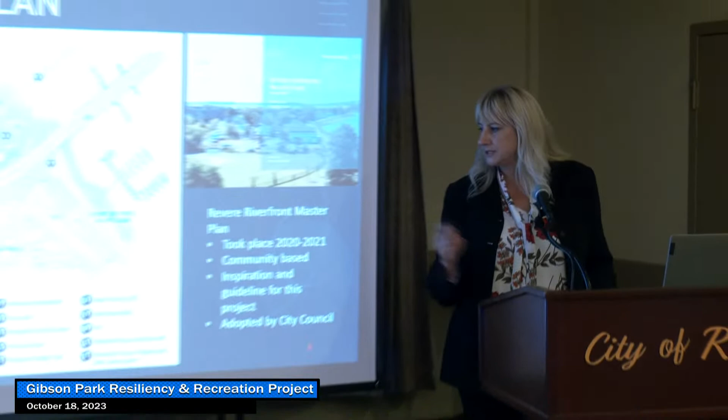So we are going to talk about everything that's included in Gibson Park. We started with the master plan, and that took place in 2020. It was adopted by the City Council in 2020. And we have used this as our guiding light, if you will, in order to develop elements of the park.

And then when we started to dig into the park, we started to realize, well, there's a lot more to it. We were able to acquire the boatyard back in 2020 at the tail end of the year. And with that, we're able to expand recreational opportunity to extend Gibson Park a little bit further.

When we started to look at what the flooding situation was there, we realized we can't really do any flood mitigation or flood risk reduction on that particular parcel or in Gibson Park without considering Mills Avenue. So that's how one project wrapped in three different parcels, if you will, but they are all called the Gibson Park Project, and they all fit under one umbrella.

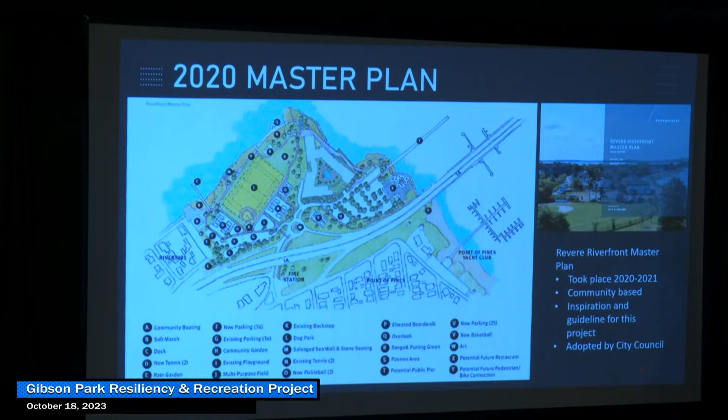So that's why maybe you haven't heard from us in a while, because we've been working through a number of elements having to do with permitting, which is very complicated. John will touch on it. We won't go too much into the weeds. If anybody wants to read the MEPA, the initial filing with MEPA, that is available on revere.org under projects and initiatives.

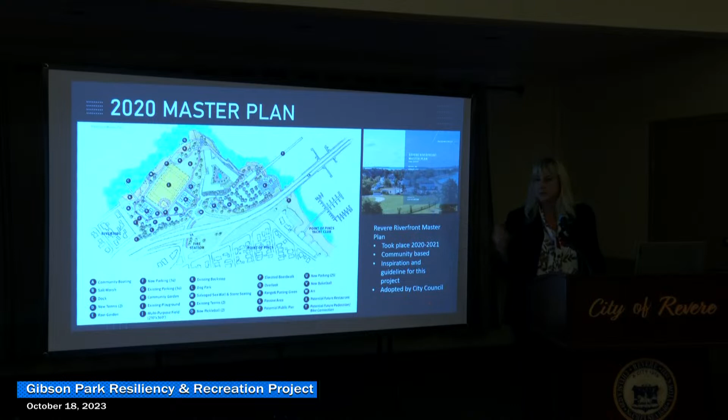So we've taken all of those comments and gone back into redesign an uncountable amount of times because there are many resource areas that overlap. So we're trying to work through all those challenges and still deliver the product that we spoke about at this initial meeting. So without further ado, I'm going to hand it over to John, and he's going to get to share the good stuff.

Thank you very much, Elle. Good evening, everyone. Pleasure to see you all again, be back talking. So Elle had touched on, we call it the Gibson Park Resiliency Project because that's kind of the anchor parcel, but it does pretty much take up this entire area.

So you can see it's the two separate parcels and the western edge of Mills Ave along the Pines River. A lot of resources in the area, a lot of different activities, but we are doing our best to provide both public amenities through the park and through the facility, as well as provide stormwater management and flood protection to the neighborhood, which is badly needed.

So just to show everyone a couple of drone photos of the area we're looking at. On the bottom you can see Gibson Park, looking from the top of Gibson Park, looking south at the existing conditions. On top it shows the former boatworks site, as well as the section down on Mills Ave, where we'll be working along the western edge to provide some shoreline protection.

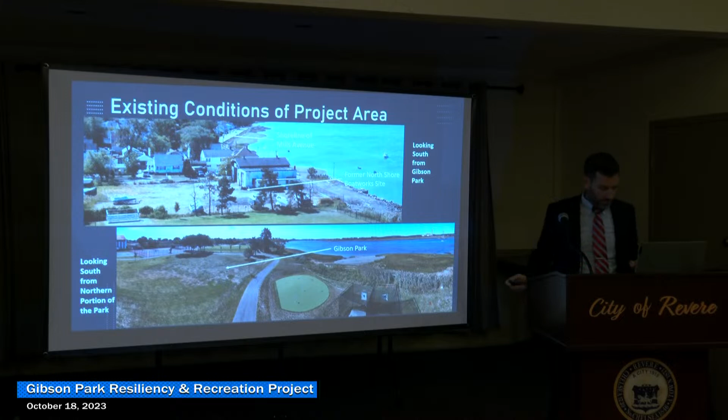The project history got birthed from the master plan. We got a lot of input from the public during that process, when we were first working our way through Zoom and figuring out what the priorities were and what people wanted to see happen. We tried to take those elements and develop a more holistic, fleshed out design than what was just done conceptually.

As you can see from some of the photos, and those of you who live it know very well, flooding from the river, even sunny day flooding, is a more persistent issue and more of a risk. So we need to learn how to address that.

The major concerns were persistent flooding and lack of formal access to the water. We don't want to provide a boat launch or anything like that, but people should still be able to get out to the Pines River—it's great for rowing and kayaking. We want to provide that public access and make sure Gibson Park, as it's redeveloped, has more amenities to serve people of all ages in the city. That's how we've gotten to this place.

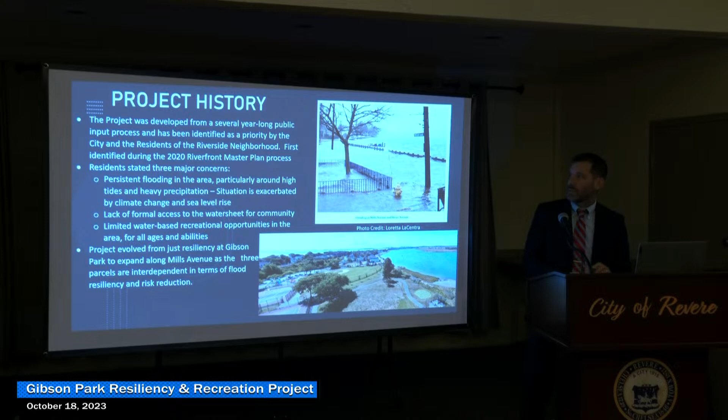There's a delay every time I click. I apologize.

A couple slides ago, Elle showed the plan from the 2020 master plan. This is the more updated version—we've gone through a lot of iterations, working with the city rec department and Michael Hinojosa on some of the priorities, plus additional input. This is the updated layout for the two northern parcels, 29 Thayer and Gibson Park.

One of the big aspects that remains is the multi-purpose field, which will be able to be used for soccer, different sports, baseball, softball, as well as lacrosse practices.

If I have a question, should I wait till the end, or should I ask now? You might get answered throughout, so go ahead.

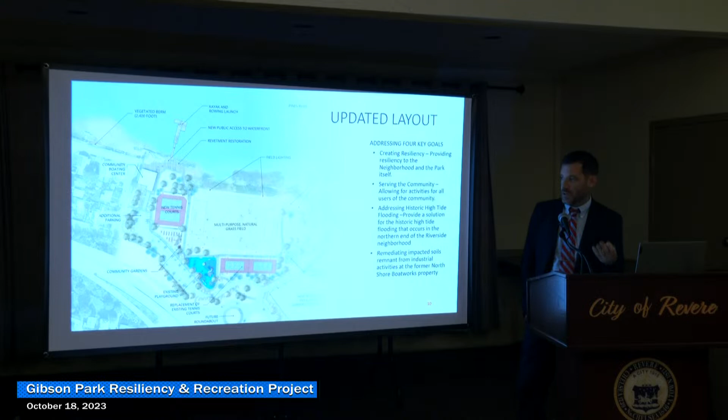A gentleman noted that the multi-purpose field area is a swamp and asked if something will be done to alleviate that. Yes, we're going to address that further on in the presentation—I actually have a couple slides that show how we will do that. It's a great question, because that is a good consideration.

Someone asked if we have this overlaid on an actual map of the area. We don't have that in the presentation, but I do have that and we can perhaps show it to you later.

We're going to keep four tennis courts, but relocate two of them south—partly on the 29 Thayer boatworks site and partly on the southern part of Gibson Park. We're stacking the other two courts to make room for access once the roundabout gets built. The building will be rebuilt totally redone and look great, with a nice waterfront deck, community space, and access to the water sheet through a gangway and some dock floats.

So we think we're hitting all of the big concerns that came out of it, and one that came up during our subsequent activities, which Elle alluded to, is there is some historic contamination remnant from the boatworks property that needs to be addressed. So we will be addressing that.

You can see that down here, but those soils will be remediated as part of the redevelopment process. We're also going to be providing protection from high tide flooding. We're going to have a redeveloped park, and we're going to create resiliency to protect the entire Riverside neighborhood.

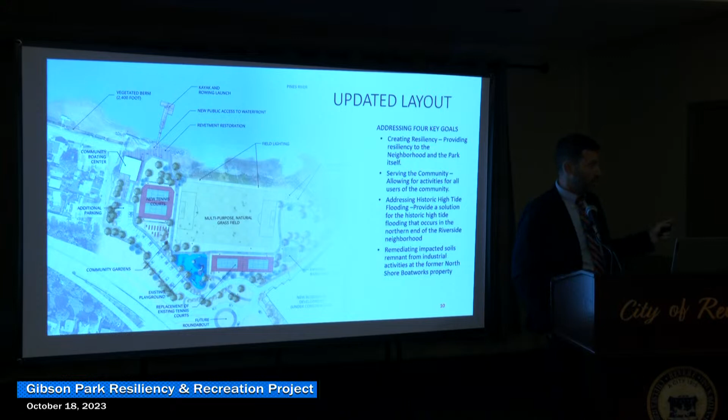Thank you, John. I'm sure I've met a few of you, but it was in little teeny boxes doing Zoom calls two years ago, so they were really little. But we had some really amazing public meetings that were awesome, that really pulled that master plan together.

The good news is we've really stayed true to that master plan. Most, if not all, of those elements have been incorporated into the plan. So we're really excited now to be able to take this next step to make the plan and that master planning process become real.

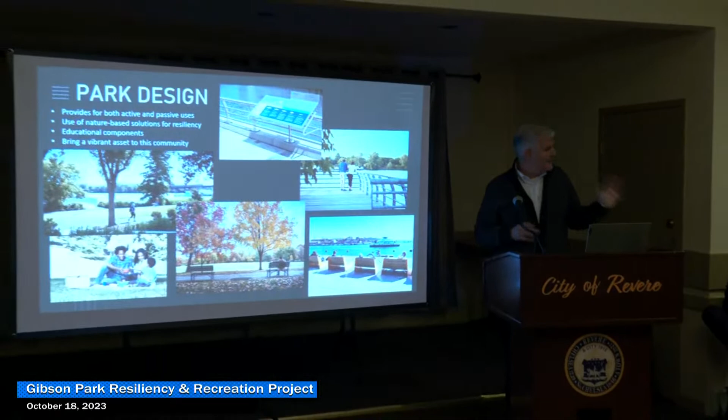As landscape architects, our focus, in addition to the stormwater elements John mentioned, is making sure we've got a really enjoyable public open space that you guys can use more often than you do now, given some of the drainage issues and whatnot. So for the park design, a lot of this has stayed true.

We'll be adding a lot of new trees. We'll be keeping the meandering asphalt pathways so that you will have the ability to use the fields, but you will also be able to use the park itself. So when those fields are in use, there will be other spaces open to the public, really trying to make this a very community-focused, neighborhood-focused open space.

Just some of the images we've got here obviously are keeping this fairly passive. Here we go, this character will continue on.

Likewise, we'll be introducing more seating, more trees. We're doing everything we can to keep the trees that are out there. Most of those will most likely be at the northern end of the site.

As you can imagine, as we start to do grading and put the new multi-purpose field in, we will lose some of those trees as it relates to the field. But that field is sized to be a full-size soccer field, and we've also got the ability to rotate those fields, so you could have smaller kid fields running perpendicular to that, trying to keep it as flexible as possible.

John did mention we are looking at areas particularly closer to the boathouse, where we will have overlooks and opportunities for people to get much closer to the water on raised platforms.

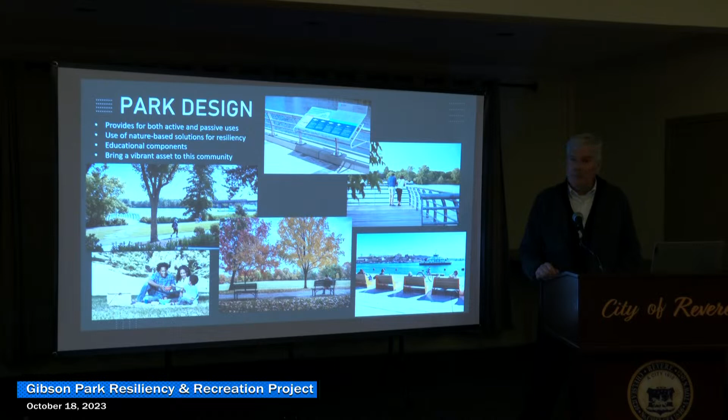For park design, I'm going to work this with John, but the focus is on getting a really good soil profile and turf surface on what most people would see on a regular day-to-day basis, getting that set up for a variety of youth activities. But there's a lot more to that field with what we're doing with the resiliency components of the project.

John will talk about this, but this is all the hidden stuff that's going to be underneath that turf that will do all the drainage work we're looking for. We're working with them to get that profile done correctly, so at the end of the day we've got this amazing turf surface, and it is real turf. We went through numerous conversations with the permitting folks to get turf, and it will be irrigated, so we're trying to get this turf and soil profile to be as rugged and usable as frequently as possible.

The question was, will the soccer field be raised up higher? There is a whole grading exercise. I'm going to let John get into more of the technical information there, so maybe that's a good segue to hand it off.

Thank you, Sean. I know you had some questions about the field. You're right, there is very poor drainage, particularly in the northern part of Gibson Park. We noticed that it retains water there. In order to develop a field, you don't want it to retain water, because every time it gets used it just turns into a mud pit. We don't want to have that.

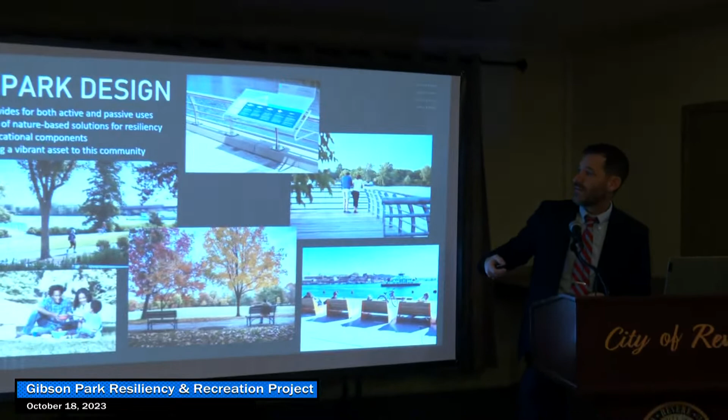So to redevelop this multi-purpose field, the idea is we're going to over-excavate that entire rectangular footprint down several feet. Let me go back two slides so you can see where it is. For reference, the existing baseball softball field is about there, so this extends a lot further north.

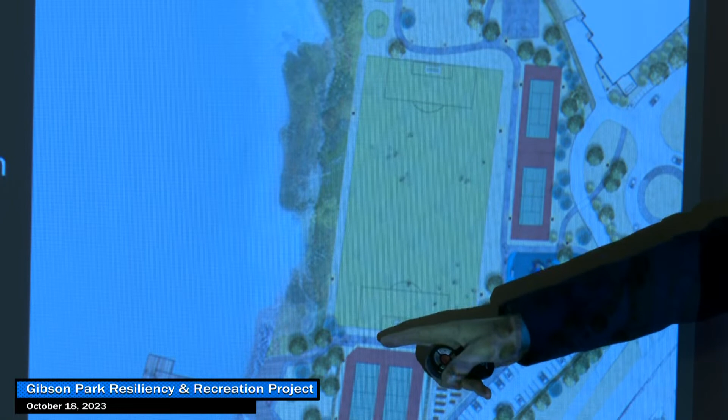That looks like it's in the marsh. It is not - we've overlaid it and laid it out. You're right, for reference the foul pole is about right here. So we will over-excavate that. What does that mean? We're going to dig it up, take all the soil out there down about 4 or 5 feet.

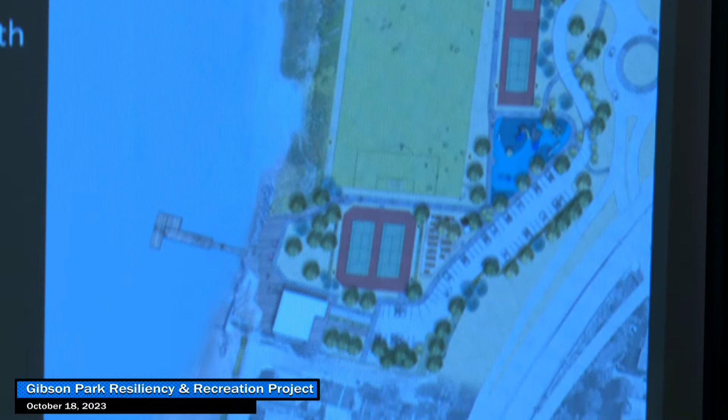Is that going to cause more water to come up? What do you mean by that? The question was, coming off the top of the ground you'd be going closer to the water table, so isn't it time to get a bigger swamp? Let me walk through the exercise.

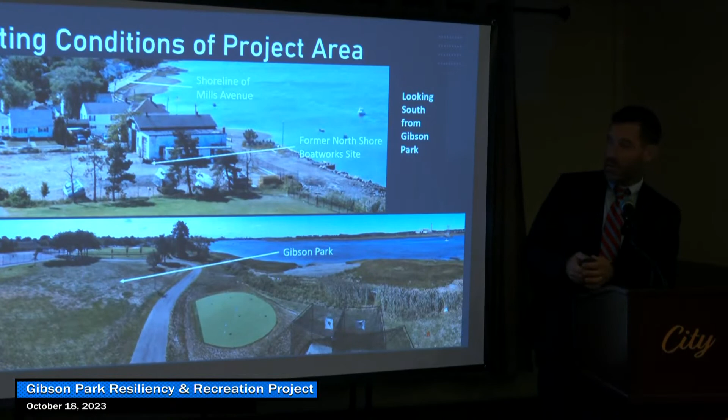We're going to excavate all that soil out, cut it down 4 or 5 feet, and put that soil over on the side layer temporarily. Then what we're going to do is rebuild it up with different material. Am I going the wrong way? Isn't this back? Oh, okay, sorry. We're going to rebuild it up.

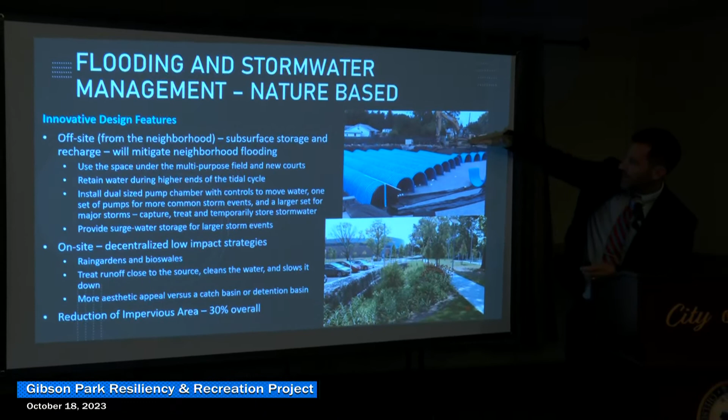First we're going to put in a layer of crushed stone. So you can see the top of our field will be up here, and we're down about 4 feet. We're going to put in 6 to 8 inches of crushed stone as a base.

Then we're going to put in these plastic stormwater chambers right here. They're open bottom, so it allows the water - they can store it as needed when you get surges, and then it allows the water to penetrate back into the subgrade. So it's a more natural way of handling stormwater rather than just sending it out to the river. This is a good way to provide storage, particularly at high tide.

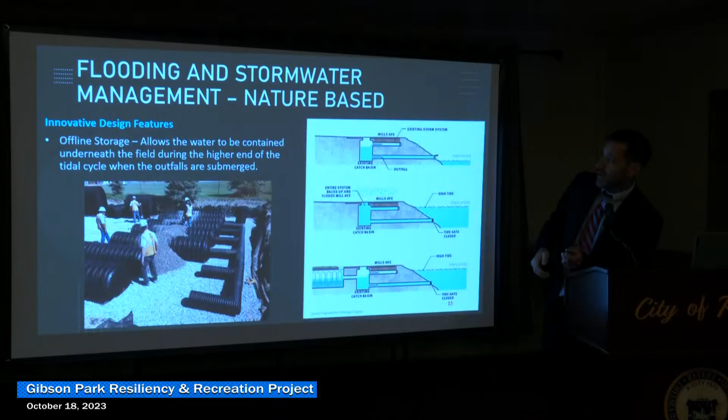So we're going to put in these chambers, cover them with a little bit of stone, and then go back up into it and rebuild - now we're creating the subgrade for the field. We're going to have more chambers along the perimeter, and then put in a sand base, which provides a flat surface as a buffer between the stone and sand so you don't have soil migration or problems going down into the stone. That's going to be your base.

And then you're going to put in a good - Sean had the marker over here, thank you - we'll put in a mix, a special soil design mix that'll have enough organics to allow the field to grow, but enough permeability to allow the water to permeate through it, and it'll be graded so your highest point is in the middle of the field.

So your highest point will be right through there, and then it'll grade off slowly, pitched. It'll be imperceptible to the eye, but enough to get the water off the field so it doesn't stay there. It's within the tolerances of a soccer field and a lacrosse field, though we have to double check that. The idea is it keeps the surface usable, moves the water where we want it to go, and allows us, with that substructure, more offline storage.

Question: wouldn't that direct some of the water towards the tennis courts and the playground? Yes, you're absolutely right, because as I mentioned, it's peaked in the middle. Gibson Park, as you know it now, is going to look very different at the end. We're going to have perimeter drainage.

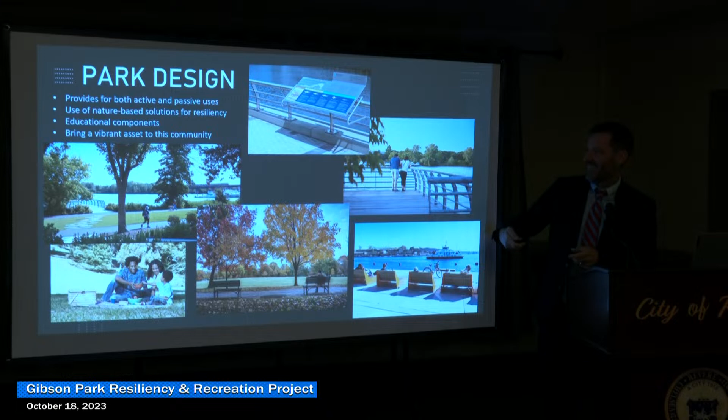Which way am I going? Come on, there we go. I probably clicked too much.

These perimeter drainage lines will be along the edge as a first interceptor trench. We'll have more, or I'll get into it in the next slide, more aesthetically pleasing stormwater controls as well. But yes, as we're rebuilding the field, we're going to make sure that all stormwater is managed and can recharge.

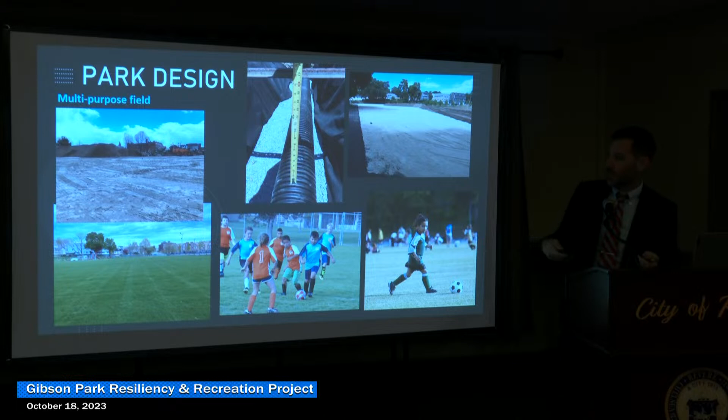This is a very coastal area, very sensitive with natural resources, so we've got to be careful and cognizant of what we're doing with the stormwater, how we manage it, where we treat it. The best thing to do is treat it closest to its source, treating any impervious runoff, any pavement, because that's where you have oils and salts that could impact the river. So near the impervious areas, parking lots and tennis courts, we're going to be putting in rain gardens.

It's the same thing where we dig down, for these ones 2 to 3 feet, depending on the soil table, and put in crushed stone at the bottom with a perforated pipe, and build it up with a planting medium, a soil medium, that supports plants but is also permeable enough to allow the water to infiltrate through. Those will be connected to a traditional catch basin and pipe network, which provides treatment. The plants' roots uptake any bacteria or metals, and they treat the first flush, it's called.

Question: what's the annual cost of maintaining all this additional plant? When we were putting that together, we have to have operation and maintenance plans when we submit the permit packages, and one aspect is to quantify how much it costs annually. I don't have that right now, but we will have it in our submittal coming up.

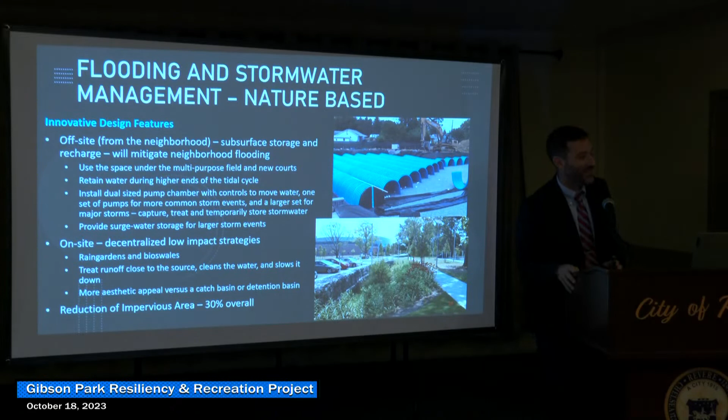Question: with these plants, do we think about things like butterfly gardens? I'll turn to Sean, that's out of my area of expertise. No, absolutely, that's a really good question. The beauty of those, in addition to the ability to take up that water and help purify it and improve water quality, is they create habitat and pollinator gardens. All of those plants are part of that plant palette, so whether it's bees, butterflies, or food sources, all of that would be part of it. It's just one of the bonuses you get as part of that community. Can we target butterflies instead of bees? Oh yeah, absolutely.

Yeah, a lot of those same plants and the flowers and the nectar are going to be really interesting to bees and butterflies alike. But yeah, absolutely, he said yes.

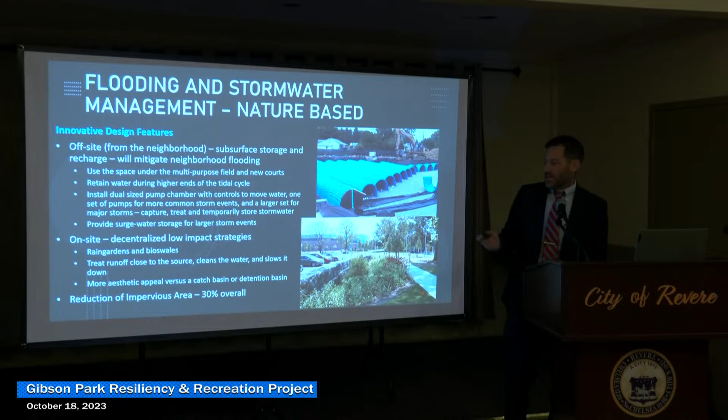Yes sir, I'm reading a little forward. It says installed dual-size pumps. Is there going to be like a pump station down there? Yes, so it's going to take me a minute to get back to the right slide again.

On 29th, so the question was about the pump station. We noted that there's going to be a dual pump system. Over here in the corner on 29th and Thayer, because you can't get there by gravity, and because this is the lowest point of the area, we're going to have to pump up to get to that subgrade.

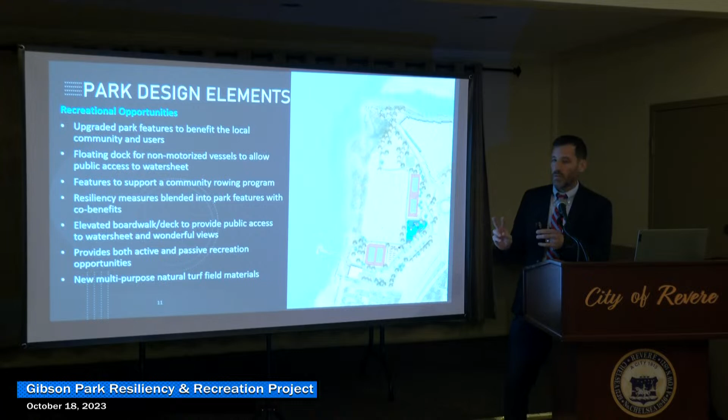How we're going to handle that, because you're going to have your average storms with very low flows, and you're going to have some really big storms that create a lot of runoff. So you want to have two pumps just as a backup, that's good standard practice. We're going to have two low flow pumps and two high flow pumps, so that when the low flow pumps get overwhelmed, the high flow pumps can turn on and discharge. That'll be located right around the corner of Thayer and Hayes, near where the existing access is currently.

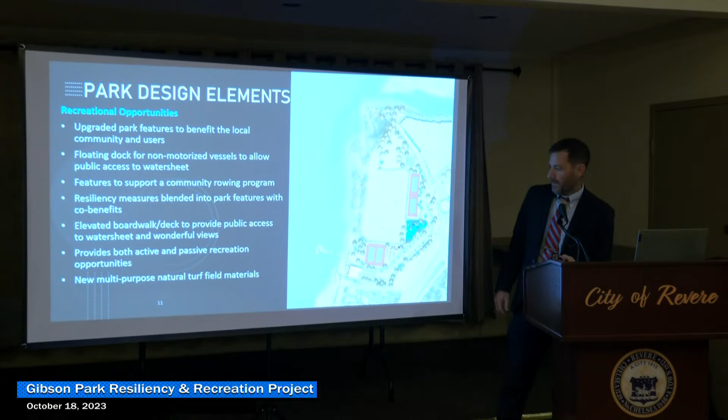Okay, I'm just going to pause for a second. We were initially going to take questions at the end, but we do have some questions from the Zoom line, so we're going to pause for a moment and take some of those. Then we'll pause questions until the end, since some of the things you might ask we'll be addressing as we continue. Daria, would you mind letting us know what you have in the chat?

The first question: the berm they're installing along the shoreline, does it restrict or eliminate our ability to launch our dinghies to our boats on the moorings? Many of us on Mills have access points currently and use dinghies to reach our boats on the Pines River. So the question is, will the berm limit access for the current access points for dinghies and docks for people who launch to get out to their vessels moored in the Pines River?

So yes, we are going to get into that a little bit later, but that is a valid concern. One of the things that's come through the regulatory process is that we need to minimize those access points. I do have a slide later on that shows what the revised access points will be. We'll get into that, but we're getting ahead of ourselves, so I'll jump into that a couple slides down.

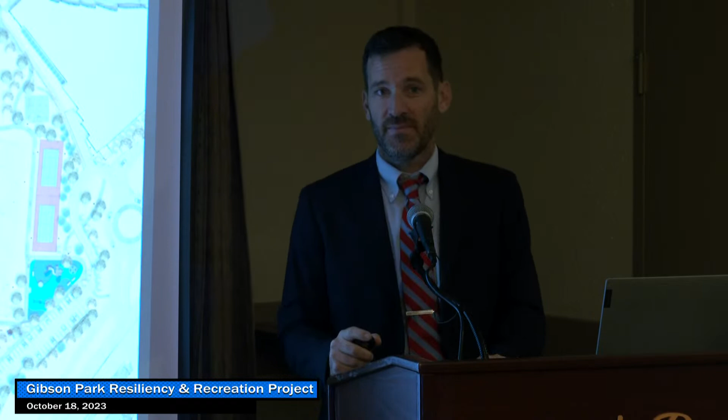So you're going to minimize the access points? The question was, we're going to minimize them, there's only going to be one access point at grade. There will be other access points, but this one will be at grade, so we get to use less of the river.

The next question is, will the field also have baseball? The question was, will the field also have baseball? Yes, that's why it's called a multi-purpose field. We're going to try and maximize sports, and that'll be for the recreation department to decide, but yes, that is intended for that purpose. Okay, it's only those two, actually.

Okay, so I think now we're going to hold questions to the end, because we are going to get into a lot of this stuff further down the line.

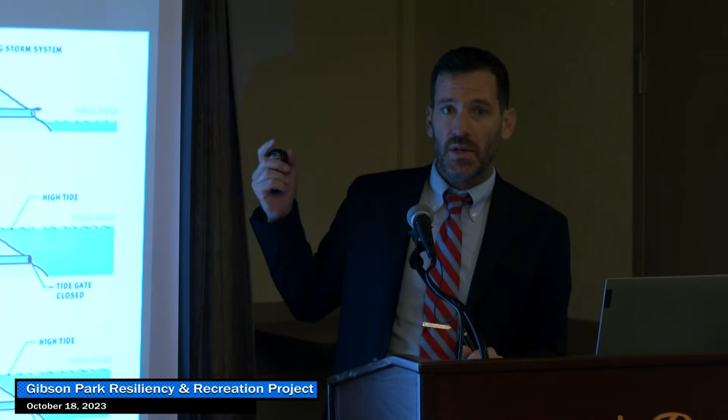I just want to talk about how we're going to be handling the stormwater to provide this offline storage. As you know, right now all the outfalls where the stormwater currently discharges are tidally influenced, meaning that at high tide the water cannot discharge and it backs up into the system, and that's what can exacerbate some of the flooding, particularly along Mills and Thayer Ave.

So how we're going to address that is by having that pump system and having that offline storage through the chambers, so that when the outfall is submerged, at least for the one at Gibson Park, we're going to put a tide gate so the tide can't come back up into the pipe. We're going to pump that water up into those subsurface chambers, and then if it's a really big storm or there's a large volume, they'll be able to redischarge after the tide drops down and the outfall is exposed.

They'll be able to follow its natural course, but this way it prevents the flooding from the neighborhood and captures it underneath the field. So that's one of the key features, so we're not making problems worse for the neighborhood.

So now, working our way south, this is what the boatworks site is going to look like. Gibson Park is up here, and Mills Ave is to the left of the screen. This is an aerial view, so you can see where we've expanded parking down from Gibson Park, and we're going to have it along this side.

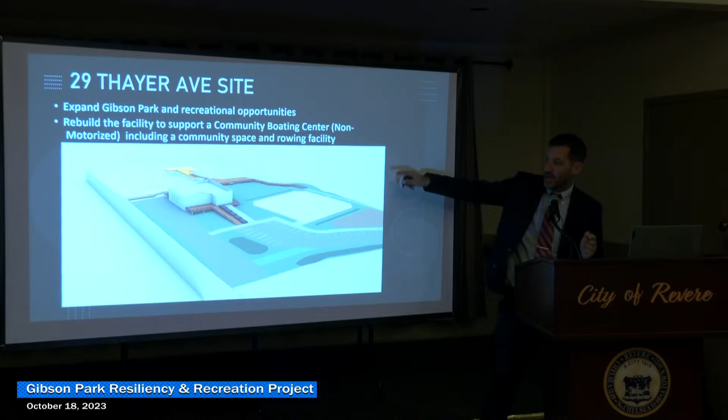We're going to have more of a passive recreational space, along with opportunities for residents to store kayaks and canoes. Because we'll be displacing some of the access points, they can create new access points to use this facility.

This is a perspective from the other way. Now you're looking from the Pines River north, looking north-northwest. Coming out from the redesigned building, you can see we're going to have this great elevated deck with a ramp up that you can walk, accessed from Gibson Park, and also from the parking area.

We'll have a gangway down with low-profile floats that'll allow for public access for launching non-motorized vessels like kayaks, sculls, and canoes. We think it's going to be a great asset, integrated in with that.

We'll have a sheet pile wall that continues our elevation for storm flood surge protection, but you won't even be able to see it because the majority will be underneath the deck, and then it ties in. This is the start of our berm, which actually starts a little bit over here.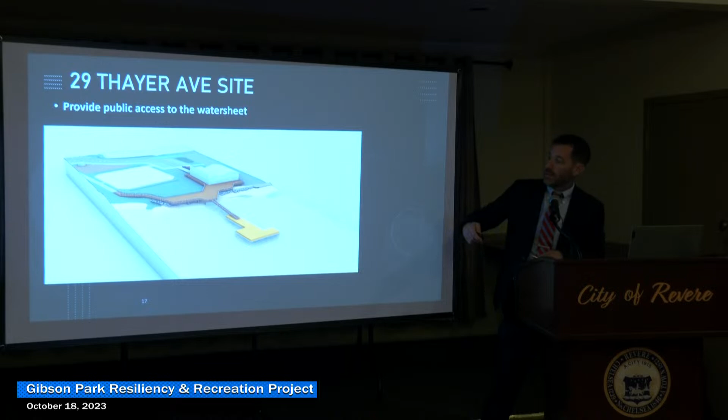So with that, I believe it's time to get into the details of the boathouse facility, and I'll pass it to Andrew.

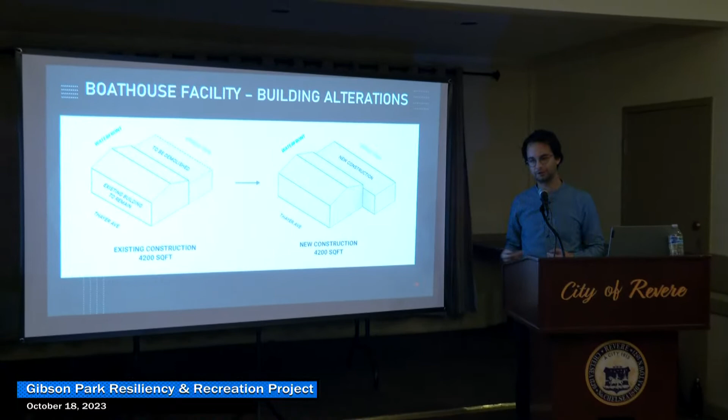Hey everyone, I'm Andrew Brooks, a director at Design Lab Architects. With me today is the rest of the Design Lab team, Rand and Sam. We also have a much more extensive engineering team helping us with the structure, plumbing, electricity, and everything like that. Briefly about Design Lab, we specialize in community buildings and buildings that require resiliency upgrades, so this is a perfect project for us. We're super excited about it, and we also love sailing and rowing, so it couldn't be more perfect for us.

To get into the building, we are proposing to demolish the CMU section of the building, the section that does not have the gabled roof—it has the flat roof. We will be rebuilding that section at the same square footage, but it will be a bit longer.

Right now, you cannot fit an 8-person crew boat in that section—it's not long enough. So we're proposing to build it long enough to fit an 8-person boat, which will allow us to more efficiently store those boats, and that section will be the boat storage section.

After studying the building a lot more, we are proposing some different demolition than what was in the previous master plan. We were looking at the exterior brick facade, and that facade is not structural—it's just holding itself up, and it's severely damaged by flooding, rain, and deferred maintenance. In order to bring those walls back up to a standard that would support this building long-term, it would be significantly more costly to maintain that brick.

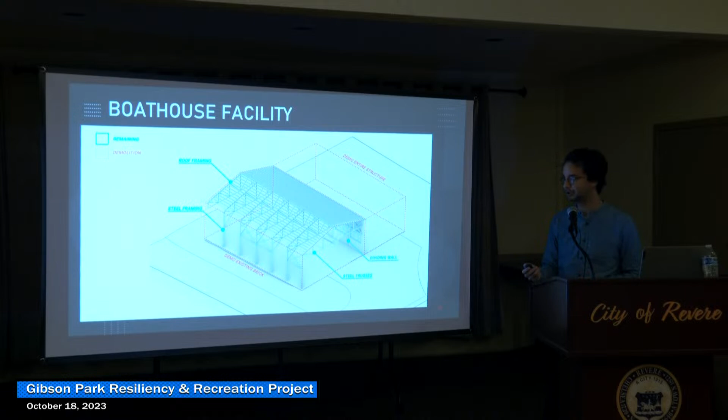I'm not sure how many people have actually been inside, but it's a rather beautiful building with a lot of artifacts within it that we're proposing to maintain.

Some things we're not proposing to maintain, like the existing lighting and the box fans hanging from the ceiling. But in this view you can see the brick wall we're proposing to maintain. There is existing glass that we'll be removing, but we'll be installing new windows—a different material and a bit thicker—while studying and maintaining the rhythm of that leaded glass system that already exists.

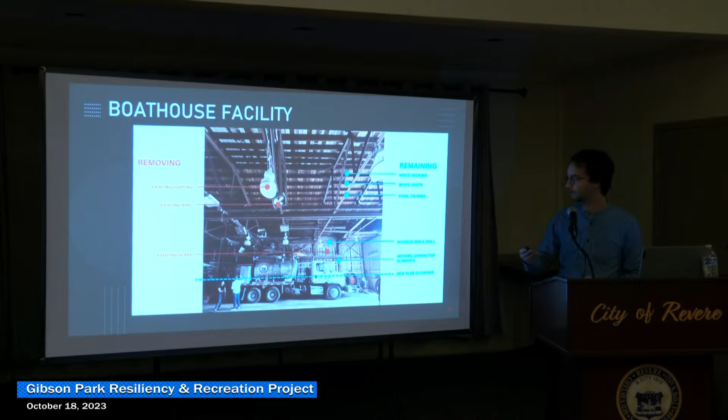We are going to keep the wood decking to the best extent we can, and of course the wood joists and steel trusses will remain. There will be some additional steel within this, but it will be expressed differently and won't be made to look like this existing steel, so you can clearly see the history of this building.

This is another view looking at the exterior wall—looking at Thayer Ave from the inside. That brick wall we're proposing to remove, as well as those windows, the sills, the lighting, and everything considered a room in this building, will be removed, and the new design will be put in place.

But of course we'll still be keeping the wood decking, the wood joists, and the steel trusses. There are a few smaller elements here, like the rails for the huge doors that we'd like to keep—those are hanging off the structure, so they're not attached to the brick, and we're going to try to keep stuff like that. There are also some boat hooks and similar items we'd like to keep; it will really add to the character.

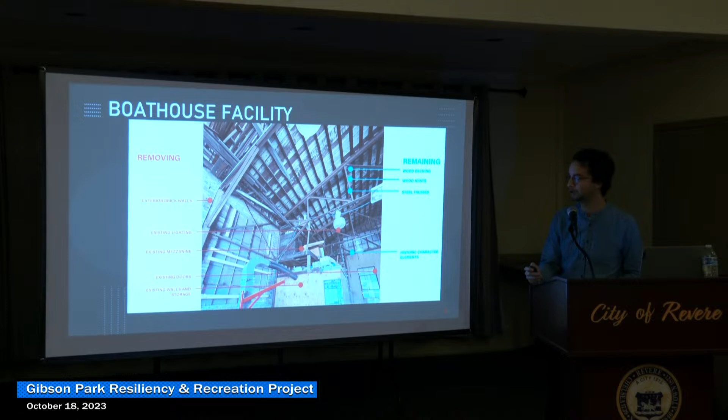Regarding the interior layout, this building will serve two programs. It will be a community space for everyone to enjoy, to have meetings like this—exactly meetings like this, actually. It will also be run by a vendor for crew boats, and that's why we are proposing to build a boat storage facility on the side of the building.

We have discussed with vendors who operate other buildings what they need. Sam is also a prevalent rower—he'll be at the Head of the Charles—so we understand what these buildings require. We've been asked to include a workshop-type space, as well as storage for a certain number of boats, oars, and life jackets, plus some community items like chairs and tables. We're able to fit pretty much all of that in.

So you can see here the boat storage is that entire space on the north side of the page. We can store 8-person boats, represented by that top boat, and there will be access on either side of this building in both spaces. There will also be shared restrooms for both the community space and the park—so all the restrooms in this facility will be used by the park.

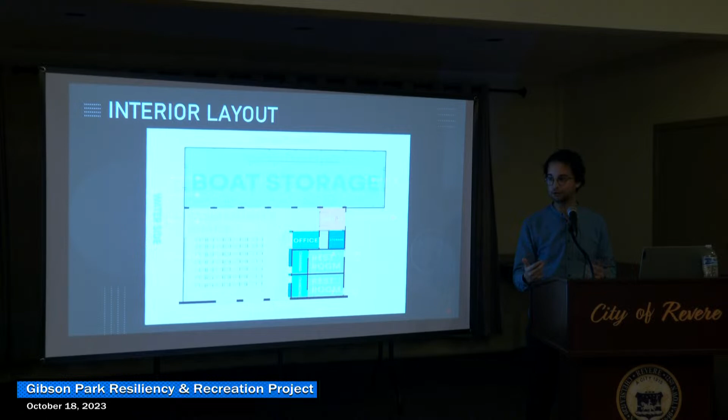So there's just some interior views. These are all kind of iterative. Again, we're at an early stage of design. We just finished schematic design, so these are proof of concepts showing that we can fit the requested number of people, the requested number of toilets, and the offices and storage spaces.

This is looking back towards the bathroom, so looking towards Thayer Ave, and these windows look out onto Thayer Ave as well. There will be storage on either side of the bathrooms, and the office will be able to look out into the rest of the room.

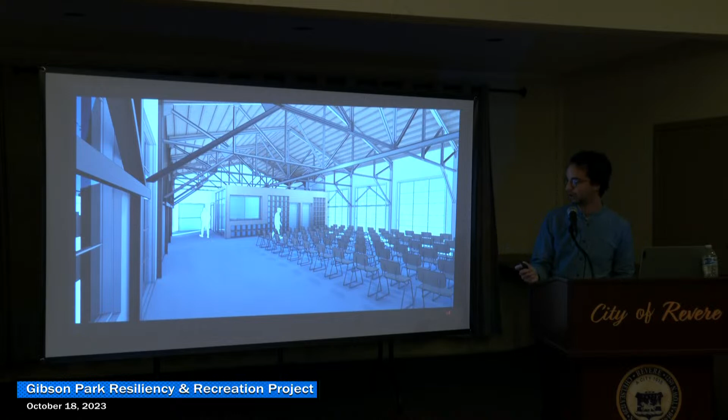Which, I hope I didn't skip a slide there.

Moving on to the exterior of the building, we are proposing 3 layers of transparency. If you think of a normal window as fully transparent and a wall as opaque, we're going to have a 3rd level of transparency, which we're calling translucent. That is something that will let light through, but you'll really only be able to see shadows through it.

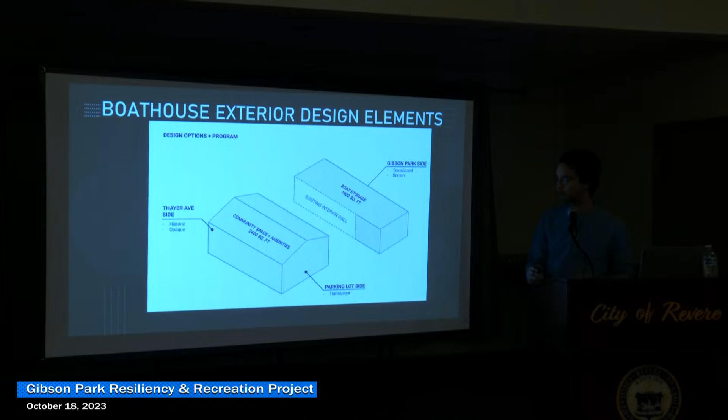This is a material that we're really excited about, and we are proposing that on the boat storage side, which is facing the rest of Gibson Park. It will act as kind of a beacon, a bit brighter potentially, and you'll be able to know where the bathrooms are, acting as potentially an entry to the park.

And so this is our exterior design. The windows facing Thayer Ave will be in a more opaque and more solid wall facing the residential side, of course. So it's not totally open to the residential side, and there will also be shades on the windows to close that off if necessary.

Copley Wolf, Sean is doing the ramps and the deck, but the entry points we've determined are to bring boats all the way up into the boat storage. It's quite tedious to bring an 8-person boat, so we tried to get direct access up to the boat storage and then access directly out onto the dock. There's also direct access to the bathrooms, and then to the community room right in the center of the space. There'll be separate ramps with planter boxes separating those.

All of our mechanical equipment will be on the roof of the boat storage facility, and that will all be screened off, so you won't be able to see that from anywhere, especially from the park. That's where the highest part of the screen will be. You can see that screen here, and that gray box is representative of what the mechanical equipment might look like, or how big it might be. It might be bigger, it might be smaller, but you won't be able to see it either way.

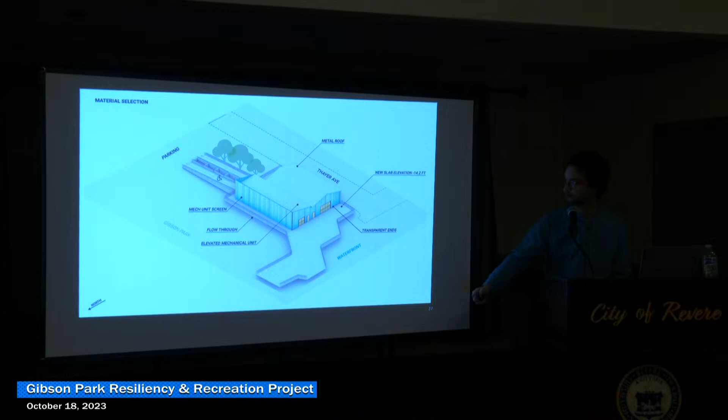This is a view from Thayer Ave of the new design. You can see the more opaque facade material. Right now it's representative of a metal panel, but we are still studying what that material could be. Again, design is very iterative, and there are many variables at play, including cost. But you can see the windows, as well as that translucent material on the front sides of this building.

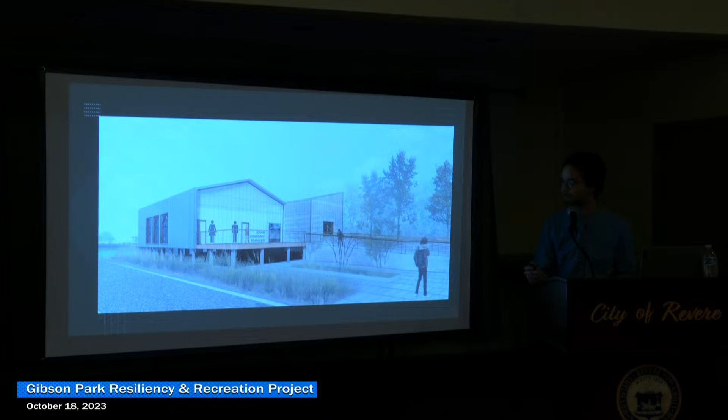And you can see under the building as well, to allow water to flow freely through. Then the back side, this is again looking from the waterfront. That opaque material gives way to the more translucent material, and then you can see the screen here screening all of the mechanical equipment.

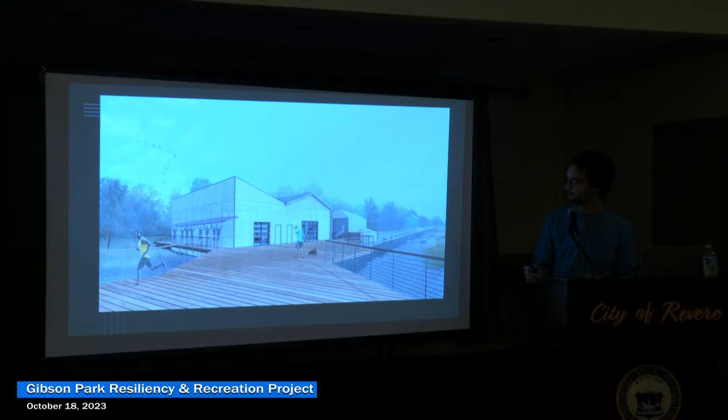So now we're going to start looking at Mills Ave and how we're going to be working our way south, how that's going to be protected. This perspective is looking at Mills Ave, looking up to the north. Right over here, that's the start of our vegetated berm.

As I mentioned previously, and we'll get into more detail in the next couple slides, the only grade access point will be right at Mills and Thayer where it is now. We're going to square that off: a concrete wing wall on the south side, and on the north side we'll put an H-pile at the edge of the sheet pile wall.

So in advance of a predicted storm surge or flood event, DPW can go out and put out what we're referring to as deployable flashboards. They're essentially stackable, interlocking boards. They have a similar system, I think just using timber over on the Revere Beach side. But that would be for this access point.

As we work further to the south, I wanted to show you profile-wise, everything's going to be elevated up and along this deck, and we'll have the gangway down to the floats that gets out onto the water.

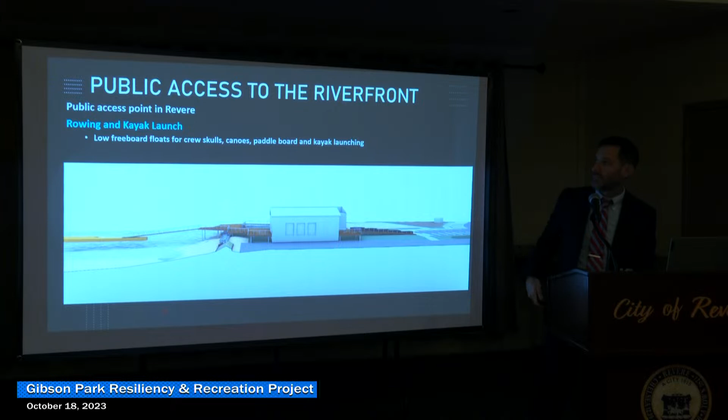There we go. Oh, one too much. Are we going to go back? I got itchy trigger finger tonight.

I apologize. So just to show perspective for everybody - if you live in the neighborhood you're probably very familiar with it - but high tide flooding and storm surge is a problem for the area. It's very low lying, with elevations from 6.4 up to just below 10. The only part of the Riverside neighborhood that's actually above the floodplain elevation is the diamond on Gibson Park at the existing field. So something needs to happen because sea levels are rising, and this increase is becoming more frequent.

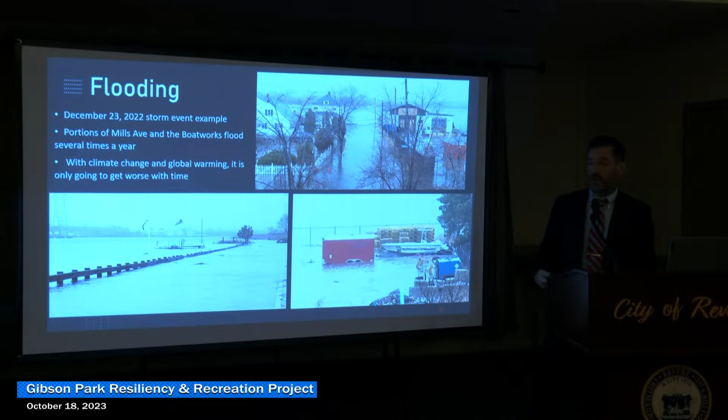I like this one because you have the guardrail giving a good visual indication - that's roughly the height of the berm we're looking to put in. You can see from this storm right before Christmas, this berm would provide protection and keep that out of the neighborhood. Again, you guys are probably well aware of it, but it's good to show why this is being done.

This gives some perspective of what we're trying to do. Currently, that guardrail sits there, but it doesn't provide any protection from rising waters, so the water can build up. Our design elevation is this 2030 10-year flood elevation, at elevation 10.3, which gets it out of the floodplain. Right now the water can come in through here and get into the yards.

In the proposed schematic down here, you can see it would be blocked out and wouldn't get into the neighborhood. An important thing to note: as these are stacked on top, the paved width of Mills Ave would be reduced. Right now it's variable, about 26 to 28 feet. It would become a 22-foot paved roadway width, with two 11-foot lanes, which is pretty standard for that speed and level of use for a roadway. But that's the minimum - we wouldn't go any less than that.

So looking at the positive side, we're reducing impervious coverage by 4 feet, which allows us a little more room to build this structure. Just for a side-by-side comparison, this is an AI-generated visualization of what it would look like - that's the perspective looking south from 29th and Thayer - with some native seagrasses.

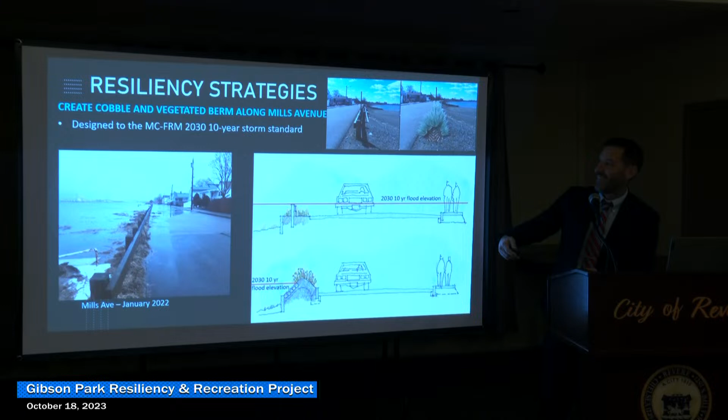All right, so let's get into the access points, because I know that question came up and we had another comment. We originally had designed it, and this has been through an iterative process, as I was saying, we've been working on this for a good 18 months.

We originally had it designed where we had maintained all of the existing access points. I think there's actually 11 if you go north to south along it, and we were going to square those off with concrete wing walls, because you need a square geometry to actually get the flashboards in so they don't leak and seal through. So you'd have to reconstruct that whole geometry and have those boards.

But through the regulatory process, a lot of the feedback we got was that that would not be allowable under the permitting regulations. It relied too much on human input, where DPW would have to get out in advance of the storm, and if there's 11 access points to deploy 11 flashboards of variable widths, because some are 4 feet, some would be 8 feet, they thought that was too much of a risk given all the resources in the area. They did not want to have that.

So we're going to have the one at-grade access point. This is if you are standing at low tide at the Pines River, looking up, that's Thayer, and this is Mills right through here. So this is what it looks like, and it's a section through it, so that's into the subgrade. But essentially, you're going to have the end of the sheet pile wall as this northern part. It's going to be an H pile wall, and then we're going to have this one concrete wing wall, and you'll have the berm here.

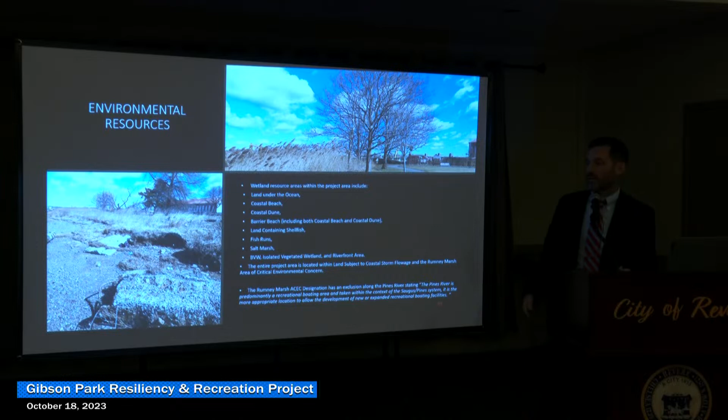That has its own set of regulations and considerations. There's land containing shellfish, fish runs, we have salt marsh. There's a lot of resources out there, which is an asset, obviously. That's what's great, and that's why you want to get on the water sheet and experience it. But it makes it so there's a lot of regulations that need to be met.

This is just to give you an idea, and we've been having these conversations for the past year and a half with different regulators. Locally, we'll have to get permits from the Revere Conservation Commission. We'll need an order of conditions. Some of you may be aware we did an abbreviated notice resource area delineation just to secure where the resources are and what's out there. That was done recently, and that ORAD was issued through the Revere Conservation Commission.

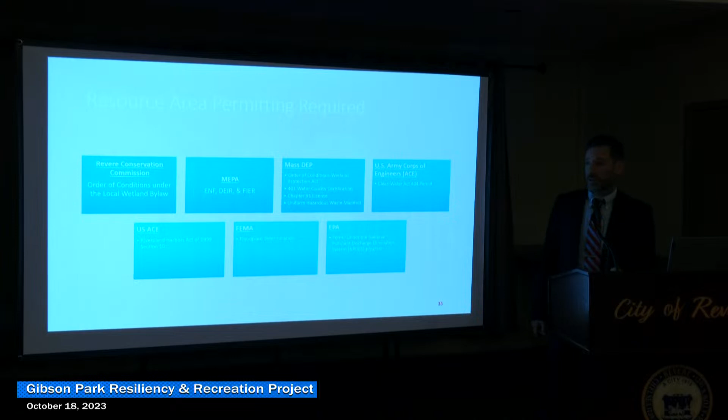But now we're in the MEPA process. We've already done our ENF, Environmental Notification Form. We're going to be filing a draft environmental impact report coming up, and we'll post that on the city's website. You'll have access, you'll be able to comment on it. We have the link later, but you'll have the chance to comment through that public process, and nothing's final. We'll get all those comments in from the regulators and submit a final environmental impact report under the MEPA process, just to get a secretary certificate to show our permitting pathway forward. It's a bit of a slog we have to get through, but we'll do it.

Then we'll be filing with Mass Department of Environmental Protection the order of conditions we file with Revere. It's actually filed simultaneously with Mass DEP, and they'll give inputs if they have any comments. A water quality certification we may need, depending on any impacts below the mean high water line. Currently we're not proposing any, but we have that in there. We've already had some consultations with them.

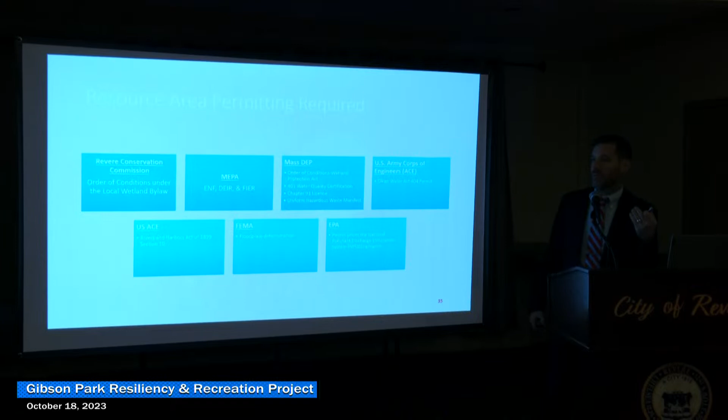We will need a Chapter 91 license. For those who don't know, that's the Public Waterfronts Act. It allows use of filled or flowed tidelands. You need a license, so we'd need that for the waterfront structure at 29 Thayer. There's an existing one, so we'd be getting a new license for what's already out there. Then there's the Uniform Hazardous Waste Manifest, for impacted soils at 29 Thayer, to make sure they're properly categorized, assessed, and disposed of in a proper location.

Under the Army Corps of Engineers, that's a federal permit — we'll be under the Rivers and Harbors Act and the Clean Water Act, getting a permit through them for some of that work. And under FEMA, if they should determine, we would need a floodplain determination. Lastly, under the EPA, we'll be doing some cleanup work — the remediation will be under EPA as well. The entire construction project will also fall under what's called a NPDES permit, National Pollutant Discharge Elimination System.

That's just to make sure the construction impacts aren't affecting the resource areas surrounding it, as well as tracking out mud and causing other issues within the neighborhood. So construction is a concern. We realize that's going to be a major impact, especially for people living in the neighborhood.

Yes, sir, Mr. Powers. Excuse me. My understanding, and I know there are some — but are they on the outfall pipes? Are they on the end of each street, going out?

So the question was about the outfall pipes along Mills Avenue — no, coming under Mills Avenue. So that Elle alluded to previously, that's not currently part of the scope. I think the city's going to be issuing an RFP for that work going forward. That is part of the process, but it's not part of this exact project, so I can't speak to that.

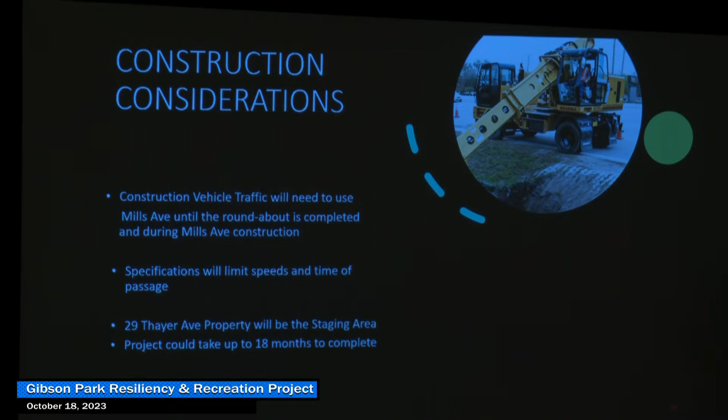I know a lot of parents end up having to drive there because there's no safe access point to walk across. So the question was, she knows a lot of parents have to drive because there isn't a safe access point.

Yes, that will be part of the plan package, from the Point of Pines area. That'll be part of the package, that they need to maintain access, or if it's going to be closed off, we will give a lot of public advance notice for that.

So now we're open for discussion, so let's let them ask.

Yes sir, I have a couple of questions. The pump houses that are going to be on the corner of Hayes and Thayer, what is the noise level of that? And what's being done to assure that people who live across the street aren't going to be woken up? Sure, so the question was about the pump chambers at the corner of Hayes and Thayer, what's the noise level, and what about impacts to people living in the neighborhood?

So those will all be subterranean pump chambers. They'll be in a well, below grade, so you wouldn't actually see them or hear them. The pumps themselves, the housings, are insulated, so I don't anticipate any noise impacts from them. You probably wouldn't even know they're going on. It's a common technology.

I know here we have sewer, but septic systems have that all the time, and you'd never hear a septic system that goes on. I know the large system has a bigger pump, so you might hear that, but at that point it's probably because it's raining buckets that you'd be drowned out by the buckets.

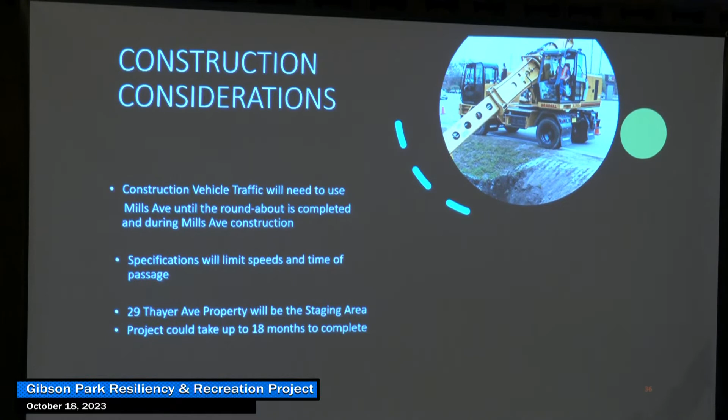Okay, can you describe what the Thayer-facing side of the boathouse is going to look like? So the question was, the boathouse, what are we going to look at? If I'm standing on Thayer Avenue and looking at that boathouse, what am I looking at? What's it look like? Some sort of opaque, yeah, I don't know if you want to try to get back to it. Yeah, no problem.

I understand what opaque is. So we are proposing, sorry, I'm stalling, to maintain the location of the existing windows. So there will be large windows with a similar leaded pattern in them potentially. And then right now we're looking at a standing seam metal panel.

Which, what does that mean? I know what a metal panel is, but is it white? Is it gray? We haven't selected a color yet. We're not even entirely sure on metal panel, or the size of the panels, or whether it's standing seam or reveal. We're leaning towards metal because it's a more natural material, actually, and it's quite resilient.

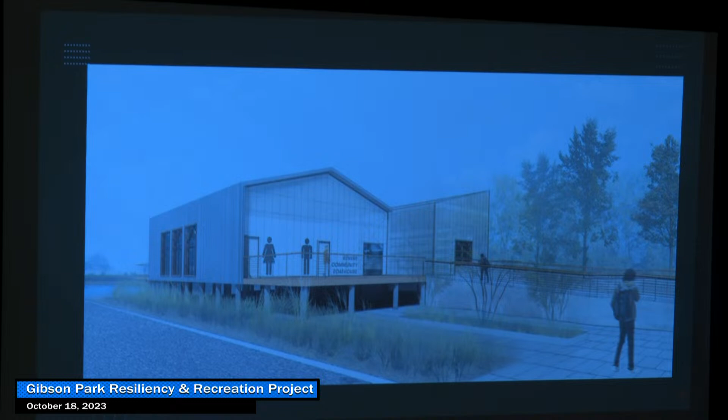And it will also patina over time, so it will kind of be representative of its location. But in terms of actual detailed looks, we haven't gotten that far in design. We've really been discussing the translucency of all the walls, as well as the location of the doors and windows, but more generally discussing materials at this point in design.

Okay, and is it anticipated that beyond those windows is an open hall, like for meetings like this? Is that what you're talking about? And is it anticipated that that would be rented out for functions? So there could be a wedding in there with noise and music, and what are we looking at there?

So there is potential for a community to utilize the space. At this point, it hasn't been exactly determined what type of functions would be allowed there. It would definitely be allowed community meetings and such. I can hear your concern about if anything was too loud or noisy. I think anything that would be allowed there would have to be respectful of the neighborhood. We're not far enough along to figure out exact uses of that at the moment.

There's no thought about sound coming through that metal wall and those windows? I mean, we live on the river. When there's a party at the wharf, we hear the music, almost a mile away. I understand that. We have to be cognizant of it — I have the same situation where I live as well, where oftentimes people say, oh, nobody can hear us. You can hear every conversation from my house that people are having on the beach. So I understand and I respect what you're saying. Good point. And we're going to talk about soundproofing from an architectural standpoint.

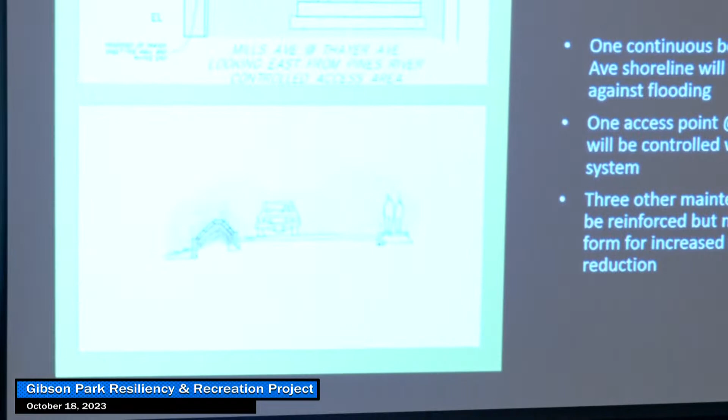I'm talking about going over it. Right, this is what I'm explaining here. So right here, where I say 3 maintenance points that will be reinforced to maintain the berm, those access points will not be vegetated, which means you can walk over it and it won't affect the integrity of the berm. If people choose to continue to not use the access points provided and just walk over the vegetated berm, it will compromise the berm.

And it will compromise the resiliency of that, and it will compromise the flood risk reduction. So we're trying to meet everyone halfway. I completely understand that the access points are important, and you live on the water and you want to have access to it. We are wholeheartedly trying to make it as easy as possible, with kayaks and everything else, park in the street, and they go right in. So folks that are going to pull up and park there, we're hoping that they're going to take advantage of the new community boating center that is going to be built for the entire community, not just the Riverside community, so that they're going to be able to drive right in, pick up their kayak, and go straight down over the launch, which we can show you at that point there.

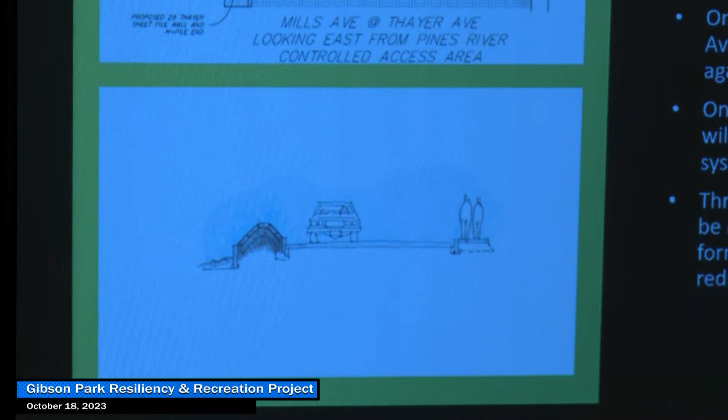So you're taking 11 access points and knocking them down. Correct. That's ridiculous. So the reason we're removing the access points is so that people won't get flooded. So, I mean, it's a toss-up. If folks in the neighborhood are not interested in having the resiliency of a berm and to stop that sunny day flooding and provide that kind of protection, that's the nuisance flooding.

Come up with a way to still give access, like a stairway over that won't interfere with anything, because people are going to do it anyway. So there are going to be access points. They will not have... You're dropping it by 80%? Correct.

Like I said, we're not 100% there yet. We've been back and forth with the regulator. No, I agree with you, and this is why we have been fighting that battle with the regulators, without a doubt. You can ask anyone on the team about how many phone calls we've had about this and how many Zoom calls. So we appreciate that, okay? And we're trying to come up with a happy medium that we're able to provide everyone that lives there the same benefits and the same great atmosphere of being able to use that space.

We do recognize that. We might be able to get from 3 to 5. We might be able to negotiate those steps. I can't guarantee it, so I can't guarantee what the regulators will allow us to build. Where the access points are going to be?

And I'm making the assumption that the berm is going to be all the way down from the boatyard all the way to 1A. Correct, because that's the only way it will work. Because if we stop it at any given point, then one of the major rules we have to follow is do no harm, which is why we started with Gibson Park, and then we had to move over to the boatyard, and then we'll move over to Mills Ave, because any of these resiliency solutions, we don't want to cause a problem in another area.

So this is not the be-all, end-all. This is a communication to all of you that live there about what we're doing, what we're proposing, what we've been through, what we're trying to get permitted. I hear you that maybe you want more, so we can take that back in our draft report and try to push a few more access points through so that you may only have to go one street over or maybe ten houses down. But we won't really be able to have...

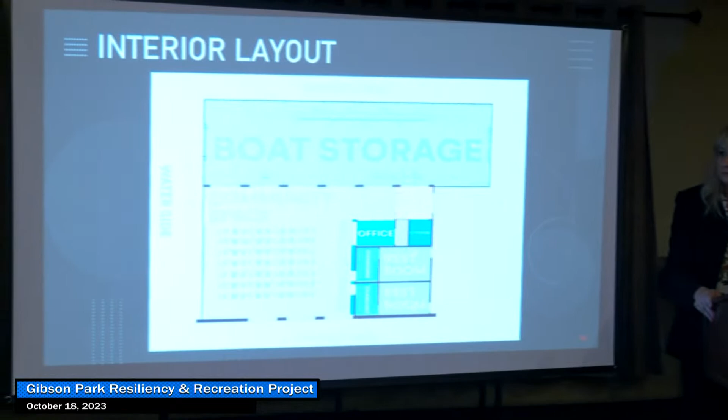May I ask? Yes. Who regulates this berm? Whose jurisdiction is it? Who maintains it? Who regulates it on the public side? Who polices it? Who maintains ours? Who are we dealing with here?

I'm going to bring up the slide. Maybe someday. I apologize. There we go. So, I can't read that, but...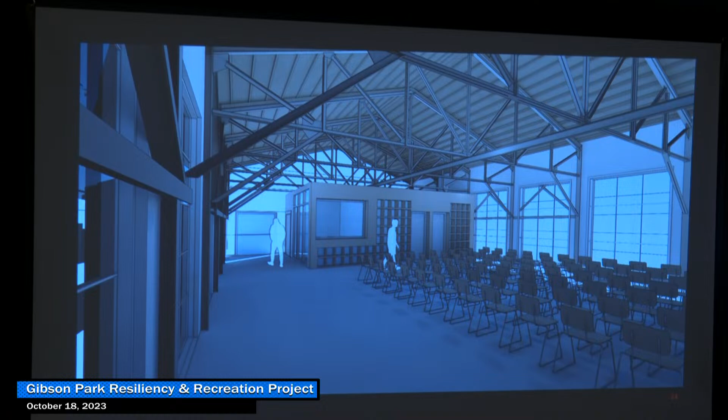So can I assume Mills Ave is going to be repaved? Is there going to be drainage on that side? The question was, will Mills Ave be repaved and have drainage? Yeah, there's going to be a significant amount of work done within Mills Ave because we're going to be cutting off 4 feet of pavement at minimum along the western edge, and then put in new pipes, new infrastructure, yes, most likely. It depends on how it lays out. I can't tell you if it'll be full width pavement or just trench paved, but there will be work within Mills Ave that will affect it.

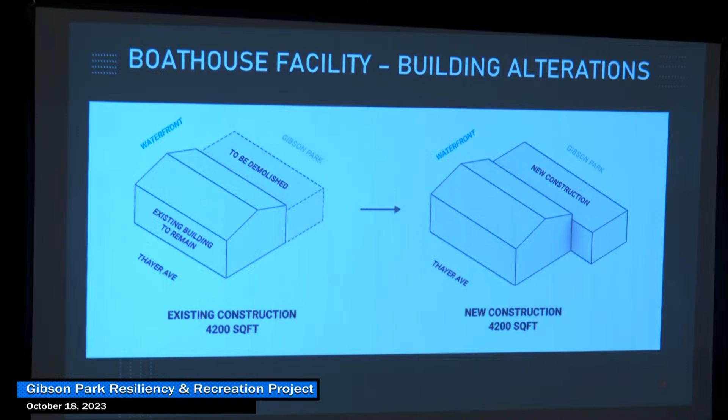And I'm going to, there we go. Finally got there. Sorry, are there any questions on Zoom? No. Okay, back to the room. There's a gentleman behind you. I just want to give somebody else an opportunity.

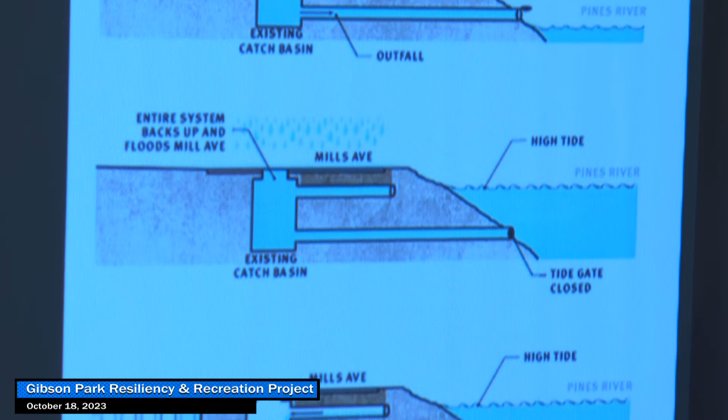Cost for the project? The question was about the cost for the project. It's until we really get the permits from the regulators, because when you get those permits, they put in a lot of restrictions and conditions that you have to add in. It's really way too premature to give a cost projection because there are so many factors that could change and affect it. It would be too premature to tell you anything right now. So there's no projection on the cost? So you're undertaking this project without any projection on cost?

Who's paying for this project? The question has two parts: we're doing this work without cost projection, and who's paying for it?

We do have some cost projections, and at the moment we've secured $6.5 million, with grants pending for another $4 million. We're actively seeking funding from multiple resources and will continue to apply for grants.

So is this going to be paid totally by grants? So far, yes, it has been. So we're talking about $10 million in grant funds total?

So your projections are that this will cost $10 million? I'm not going to speak to that until we're through the permitting process, because there are many elements that could fluctuate and change.

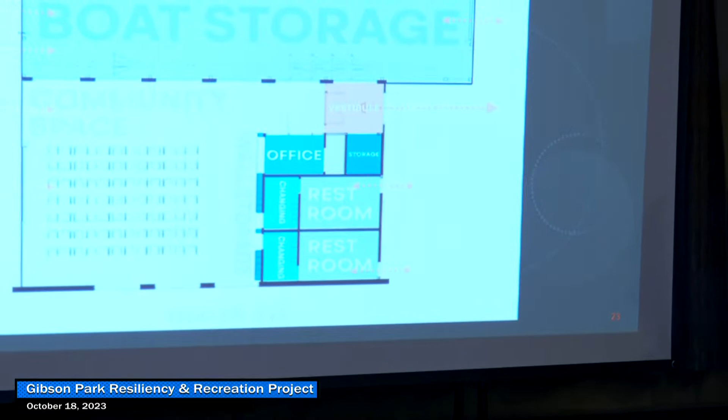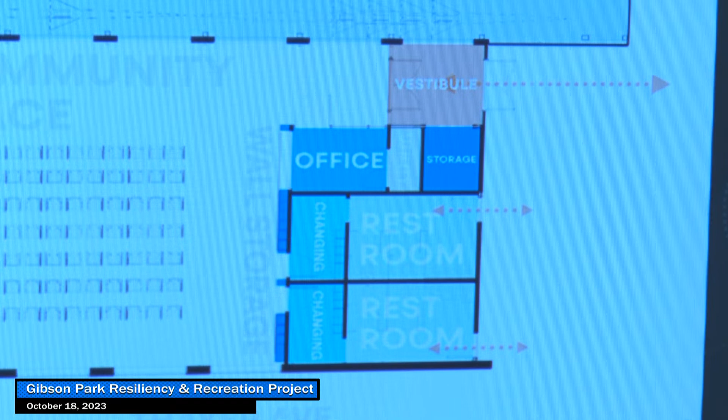We'll look at the distances between and make sure there's a bit of a wing wall sticking out from the door, so you can't see it from more than 90 degrees. But we'll check the distances and potentially at least flip the restroom walls and see. No, definitely not, no. It's really just for if there's a larger event being held at the park or otherwise, but they are not going to be open 24 hours a day. Absolutely not. And will there be light pouring out that window?

I know you said there's going to be an option for shade, but 24 hours - all the lights will be on a control system, so there'll be timers, more complex than in your residential home, and they'll be able to turn off at night, or there may be security in the vestibule, but what's coming out of the windows will not be abrasive at all. Okay, well it's really beautiful, but I hope you'll consider that. Definitely, thank you, appreciate the feedback.

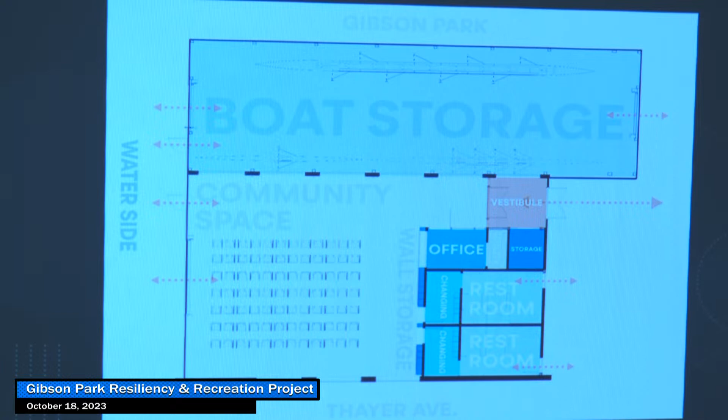Can I ask a question? You said the berms are going to be as high as the Ave. Yes. At the end of River Avenue, the tide comes higher than the Ave.

So the question was about the height of the guardrail. That's just a visual perspective. The road isn't flat, it undulates, and River Ave is the lowest point on Mills Ave, so that's why it goes above the guardrail where it is.

So it's going to be a constant elevation of 10.3. To give perspective, at River Ave it'll probably be about 3.5 feet higher than the existing grade over there. The berm will visually look higher there. If you look at it straight across, it'll be flat, but it's shorter in some parts and higher in others because it has to match the grade of the existing roadway. But the elevation will be consistent, the same across, so no one's more vulnerable or more protected.

So in some places, say it's 8 feet at one point and 9 feet at another, there will be a variation in how tall the vegetation is, but at the end of the day it will all meet the same elevation. So yes, to your point, it will be over the guardrail and slightly over in that situation, at that elevation.

Did you say it was going to be a 4-foot wall where Thayer meets Mills at the boatyard? The question was, did I say it was a 4-foot wall where Thayer meets Mills at the boatyard? No, it will not be 4 feet high. It's just where the lowest perspective is. I think the lowest point of the roadway is elevation 6.8, and the top of the berm is 10.3.

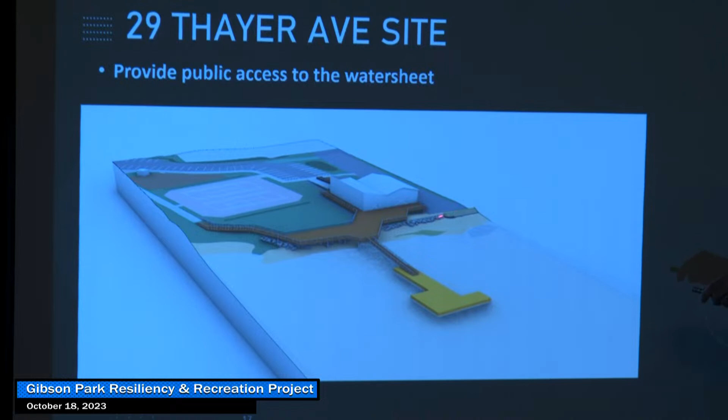See the pale yellow? Isn't that where Mills ends and Thayer begins? Back up the pointer there, back towards you, right there. So right now I can drive right through there into the area.

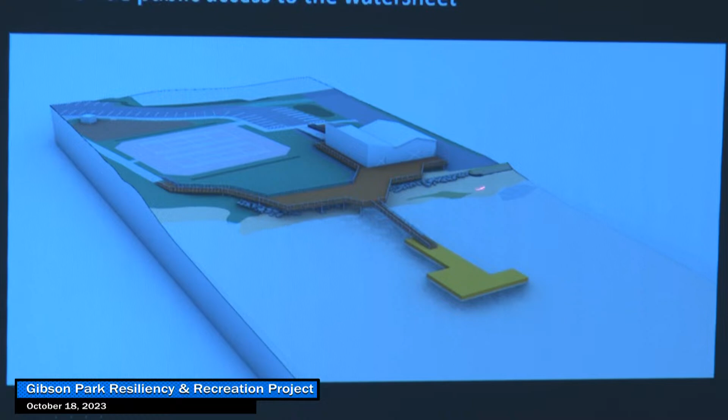What's going to be there at the end of Mills Ave where it meets there, in this direction? That's going to be the at-grade, the only at-grade intersection. So you'll still be able to drive back down there and get out. It'll be reinforced to keep people from driving in there and parking, because if they leave it too long, they're going to get flooded by the tide, since it's a beach area. I think what you're saying is if you're heading northbound on Mills Avenue towards that access, you won't be able to drive there at all. That access is going to be closed off.

I'm going to advance to the next slide.

So basically, in front of the boatyard is going to be a sheet piling. This is you driving north, coming into the page north, and that's there right there. So this is Mills right here. You're going to have those existing bollards right here, the berm along here, the sheet pile wall here, and this deck that's built out from here.

What's a sheet pile? So it's a steel wall, thin sheets of steel, like a bulkhead. You would see it like on a shoreline structure.

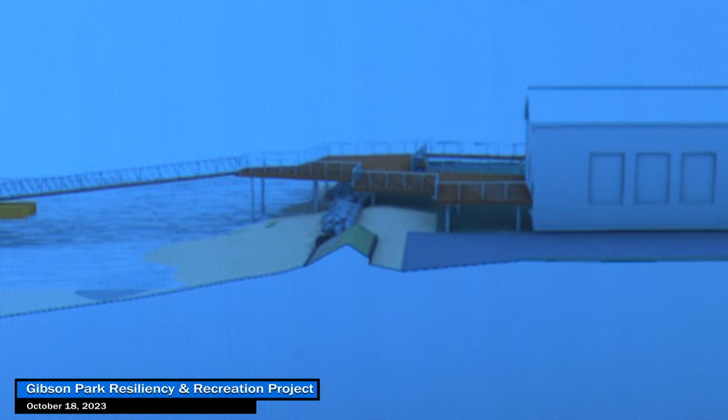And where does that stop? So that stops at the edge, if you extend Thayer Ave out. It stops kind of right along the edge of the building, if you run a straight line, right there. But it's going to go around in front, right? And then it would go north up from there. Yeah, so it goes underneath the deck. That's why you wouldn't really see it except for this small section where the jog is, but it's along this profile, this area right in here, and then it goes underneath the deck and wings around.

What keeps water from coming down this way? Why can't water go under that deck and come right down? Because all this elevation is higher. So from the north side, you're protected just by the grading. It's really when you get down here where everything's lower. Thank you, okay.

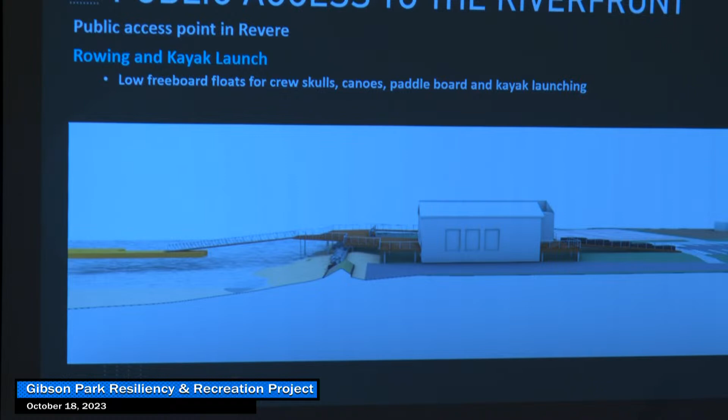This is great, this is exactly what we thank you guys for all the feedback. I know it's been a long time and a lot of questions, so I just want to thank everyone for hanging with us. Thank you.

Appreciate it. We hope that we've addressed all your questions, perhaps not all your concerns at the moment, but we did want to have this opportunity for a check-in to let everyone know. We have been working diligently on a lot of different variables, so we're glad to report back where we're at as we continue to move through the process. As Frank mentioned, there will be another opportunity for comment from all of you with the regulators.

If you're looking for different types of access points and you're not happy with what's being allowed, that's a perfect time to bring that up. It may give us some more leverage to offer a little bit more than we think we're at right now with the regulators, having heard directly from the folks living there. I also want to give a shout out to everybody who has offered letters of support to continue the funding we keep applying for. Sorry to not really address that question about the budget.

As we move through, one option versus another can have a vastly different consequence in regards to price. So I don't want to set any expectations unrealistically until we're a little further down the road and have more of a stamp of approval, so we know exactly the direction we're going.